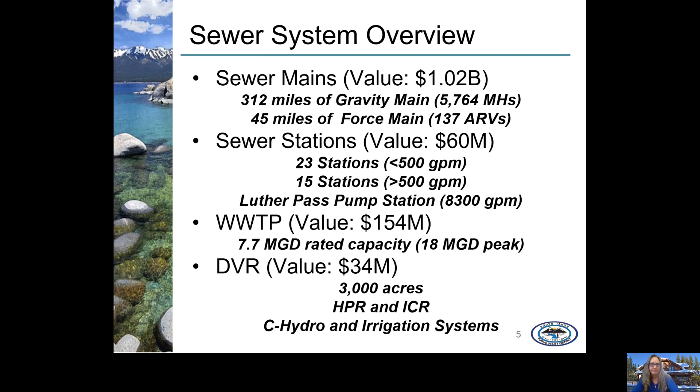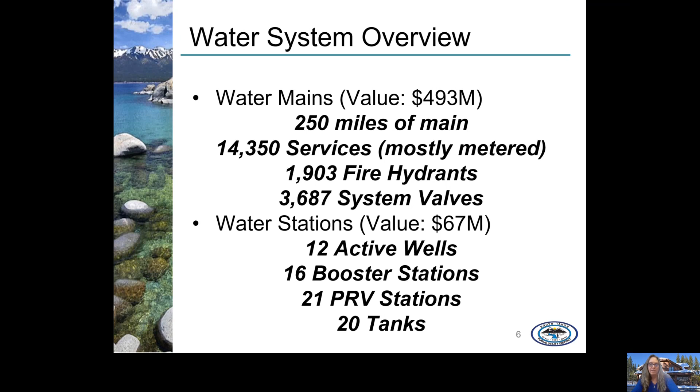The origin story of the district's water system could not be more different than its sewer system. South Tahoe Public Utility District did not build its water system. Instead, the water system that we manage today is made up of a patchwork of small neighborhood water systems acquired and cobbled together by the district in the 1970s and 80s. These mom and pop systems were typically installed by developers and were built to a lesser standard than we would design a water system today. Almost 90% of the value of the water system is in its underground piping network.

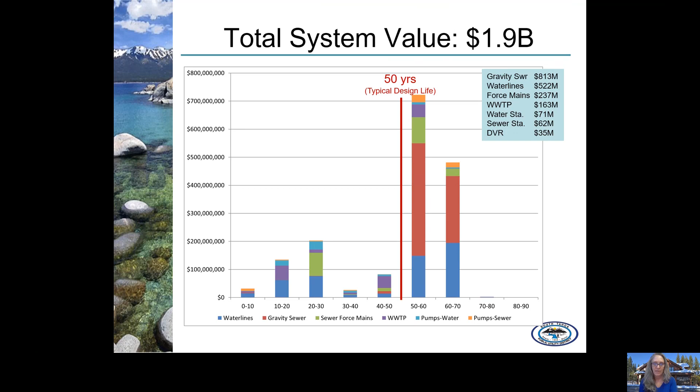One more thing I want to point out about the age of our water system. We use the district's GIS mapping system to develop this plot. Almost all the water pipes in that system have been assigned an age of 70 years or younger. However, district staff recently uncovered a master plan document from 1960 that suggests portions of our water system that are still in service today were likely installed as early as the 1930s. So this graph actually underestimates the age of our water facilities. There should be blue columns in the slots for 70 to 80 and 80 to 90 years old.

So how do we assess our system annually to come up with the capital improvement program to rehabilitate our aging assets? First, I want to make clear that we don't develop a wish list or a catch-all. We are very methodical about how we decide which potential projects make it onto our plan for the next 10 years. These are the projects that are needed to maintain a system in good health. This is also not the unconstrained projects list, which is a term that we often use. I'll talk about the unconstrained list in more detail later, but basically the unconstrained list is a long list of additional projects that we have identified but that did not make the cut for the upcoming 10 years. The projects on that list could become critical at any time and get moved up onto the 10-year plan.

The district has selected 10 years as its planning horizon because that is a manageable time frame. It allows enough time to plan, design, and fund projects without looking so far into the future as to become cumbersome. 10 years is also a reasonable time frame in which we should expect to be able to meet many of the goals that we've set for ourselves. If it's going to take more than 10 years to achieve a goal, is it really a priority for us?

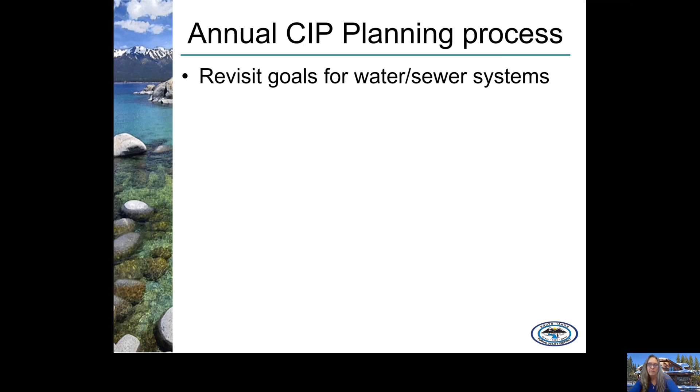To define the projects considered for the plan, first the engineering managers meet with each of the crews individually to review the list from last year and add new projects. We listen to their concerns for their facilities and weigh their priorities.

There are also a few projects that engineering has added to the plan to anticipate future system needs, mainly gravity sewer and water pipelines. We look back at the inspection and leak history over the last year, update our projections, and move new projects onto the 10-year plan if warranted.

We figure out what facilities are not getting the attention they need, and we add new asset management programs to the plan to provide us with that information so we can make smart decisions for those facilities in the future.

Once we have the project list, we look at the timing, spread the projects over 10 years, distribute the costs and workloads evenly, and submit that to finance for budgeting.

We have some back and forth with finance and we discuss the needs with our board. That's what we're doing today.

The last thing we will do is take the new plan and update or compile new project information sheets. These sheets were distributed to the board for the first time last year, and we'll update those this year and redistribute them both to the board and to staff, then post them on the website later this spring once we know what next year's budget is likely to be.

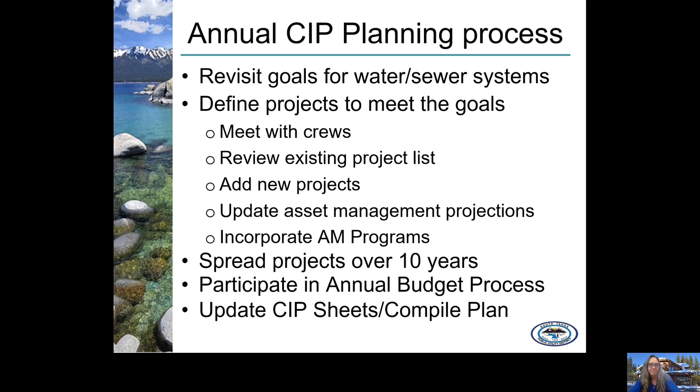Some questions I've heard from the board are: what makes a project? How does staff decide what goes into the plan? And what turns a concern or a project concept into a need that should be addressed in the next 10 years? Well, the project must achieve a goal that the district has set for itself.

The main goal of the CIP is to address critical failures within the systems. But beyond that, we also need to address other deficiencies. To guide us, we turn to the levels of service criteria that the district has developed for itself, and we consider other external drivers, such as interagency coordination or pending regulation, to help set our priorities.

Just a bit more about the levels of service. What are they? These are a list of goals that the staff has developed with board input for the water and sewer systems. We did those for the water system back in 2013.

with our last water system optimization plan. And even earlier than that, we developed the levels of service for our sewer system back in 2009 with the collection system master plan. Those sewer system goals got updated for our Big Five condition assessment for our 5 largest sewer pump stations over the last couple of years.

Basically, if a project concept aligns with any of these goals, it moves forward. If it doesn't align with these goals, the project doesn't move forward. It may, however, remain on the unconstrained list and wait for either the goals to change or the condition to change so that it drives up the project's priorities.

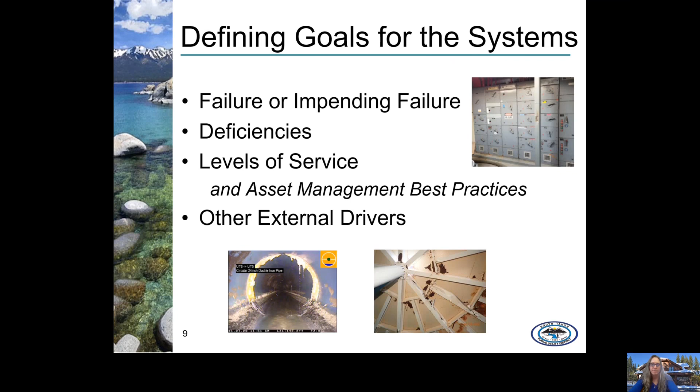Let's talk specifically about what goes into our CIP or our needs-based plan. This slide describes the specific goals for the projects included on this year's sewer needs-based plan. All of the projects on this year's plan meet one or more of the goals on this slide.

This is the same list of goals that we used to build the plan last year. It didn't change from year to year.

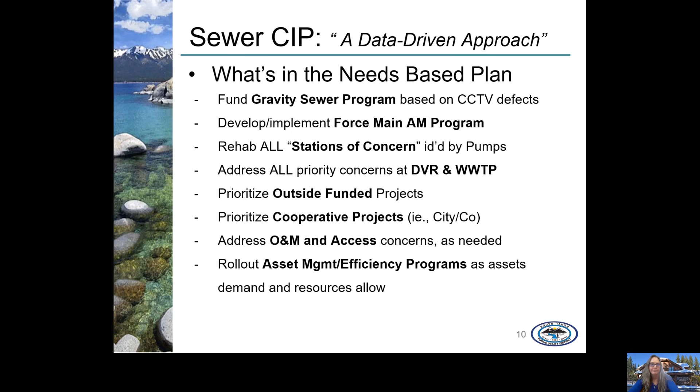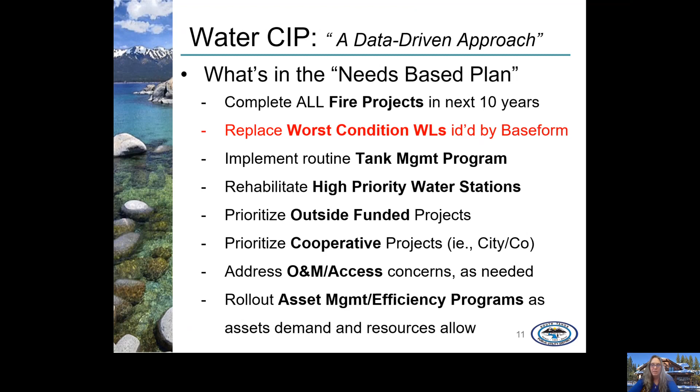This year, we input our complete list of waterline projects into our new artificial intelligence tool called Baseform, and Baseform ranked them for us by priority. We made sure that the 20 waterline projects with the worst condition scores made it onto this year's water needs-based plan. This added around 20,000 linear feet of waterline replacement to the plan, and it accounts for most of the increase between this year's plan and last year's plan.

So that's the process we followed to develop our CIP plan in a nutshell. At this point in the presentation last year, I gave the board a brief overview of several of the most stressed parts of our system, talking about water tanks, sewer pump stations, the wastewater treatment plant, and so on.

Today, we're going to focus solely on water lines because that is the system that has been the hardest hit by past funding decisions, and it is the system we are most concerned about its continuing health moving forward.

At the risk of repeating myself, it's important to remember that the district did not construct most of its water system itself. It consists mostly of mom and pop neighborhood water systems acquired by South Tahoe PUD in the 1970s and 80s and cobbled together into a very complex network of zones and a wide mix of construction methods and materials.

Here's our current situation. This year's proposed capital improvement plan for the water system calls for over $73 million in water line replacement in the next 10 years. Water lines account for more than 65% of the total needs for the water system. By contrast, this past year's budget approved a 10-year plan that would only replace $33 million in water lines over 10 years, even though more than 50% of the current budget is for water lines.

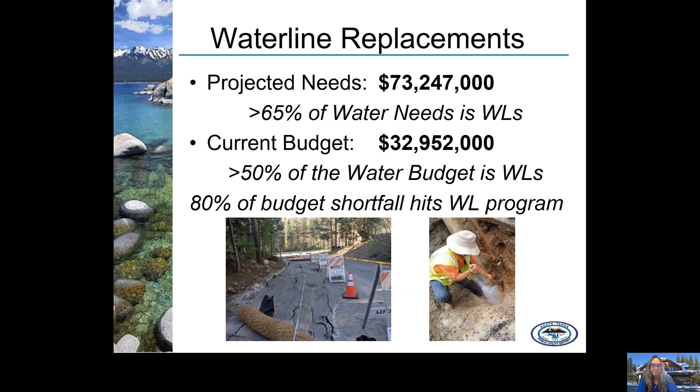Before we start to talk about the condition of the system, let's take a minute to look at the goals the district has set for its water lines.

The district has set a goal for itself to have 100% of its water system provide customers with access to emergency water. The district has also set a goal to maintain an annual replacement rate of 1.7% of the total system value or more per year.

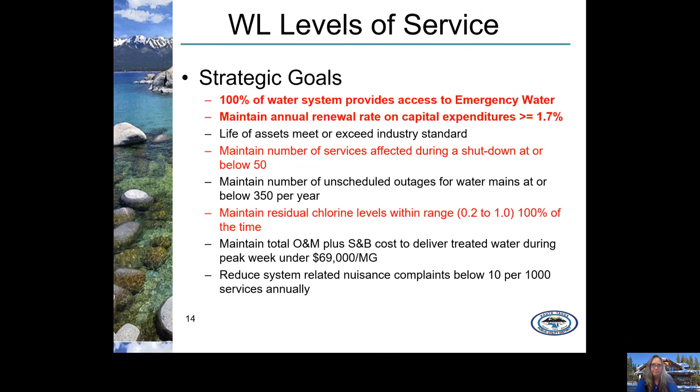Over the past several years, the district has gotten pretty good at comparing its current performance to its own past performance, but what we haven't done a lot of yet is compare our performance to others. There are tools for that. For today's presentation, I decided to use the 2020 AWWA—that's the American Water Works Association—benchmarks survey to see how we are doing compared to other agencies in our region. The AWWA defines our region as the Western United States, Western Canada, Alaska, and Hawaii.

So, starting with the replacement rate: according to the AWWA benchmark, 25% of the agencies in our region replace their assets at a rate at or above 1.5% of the system value per year, and 25% replace their assets at a rate at or below 0.4% per year.

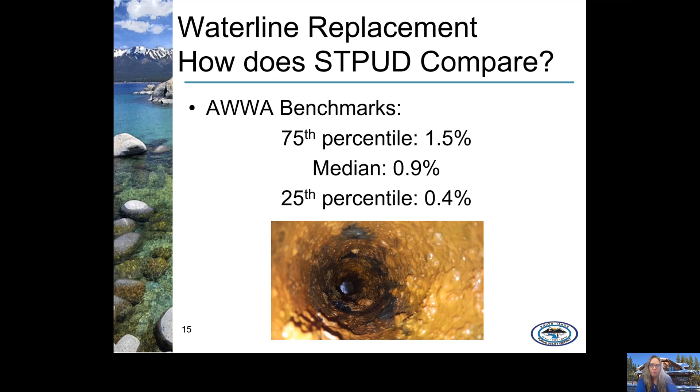The red bar is that 1.7% level of service goal that the district has set for itself. To replace 1.7%, we would be replacing 22,500 linear feet per year, and we could replace every pipe in our system over a 60-year period.

In the early years of the program, we were doing pretty well. We were meeting or exceeding the target around half the time, and we were averaging about 1.2% replacement rate per year. But then in 2009, our replacement rates started to drop, and they've never really recovered.

In one year, in 2014, we had a pretty big year. We installed 3 waterline projects across the city area, but then our progress plummeted. The focus shifted to the meters, and the waterline replacement program has essentially collapsed. We've just started to recover, but at a small fraction of our former annual replacement rate.

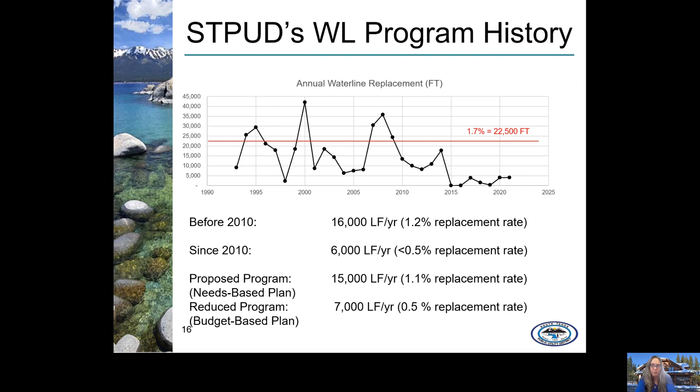We've been concerned about contractor capacity to take on the volume of work that we need to complete. But clearly, in the past, we have found ways to get that much work done. In 11 of the last 29 years, we constructed more pipe than we're currently proposing that we install over the next 10 years.

Now, let's take a look at the other level of service goal that we're going to focus on today: how are we doing providing access to emergency water? For fire hydrants, fire pumps, and backup power, all the known deficiencies will be addressed in the next 10 years with the current budget. And the district has been very successful at getting outside funding for these efforts.

So while the current 10-year plan sets aside capital funds for them, it is very likely that the costs associated with these goals will be at least partially offset by grants. But the biggest piece of this level of service goal is addressing undersized water lines in our system, and that element is underfunded in our current budget.

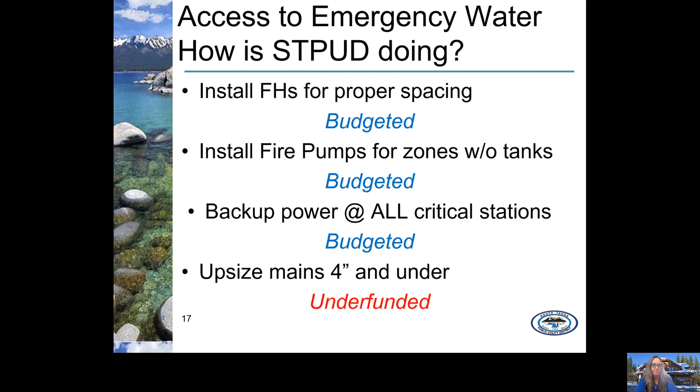As of 2013, when the levels of service goals were defined, we had 242,000 linear feet of 4-inch and under water line remaining in our system. But over the last 10 years, we haven't made much progress chipping away at this number. If we continue at this rate, it'll take another 44 years to replace it all.

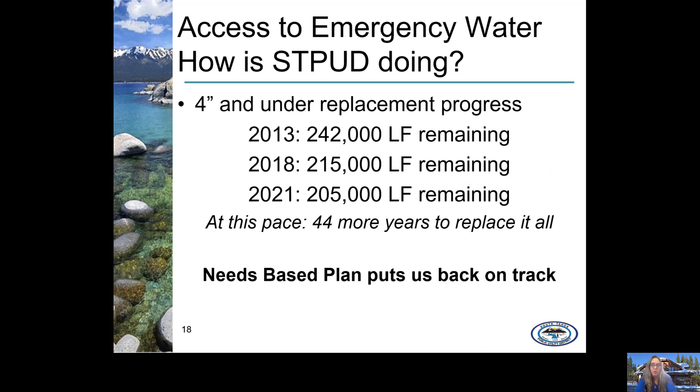However, if we had kept pace with our pre-2010 waterline replacement rate, by now we would have replaced an additional 130,000 linear feet of undersized main, and we would have addressed all of our remaining fire flow needs as well as the top 9 condition-based replacements. If we resume our former pace, then we can address all of our fire deficiencies in the next 10 years.

So that covers how we're assessing deficiencies and level of service goals for our water lines. But the biggest problem is this: is our water system failing? Back in 2017, the engineering department was challenged to improve its use of data in identifying capital projects. We've worked hard on that, and we hope you'll agree that we've made a lot of progress.

We're going to focus on that data to help us confirm that our system is failing. For the water system, our focus has been primarily on 2 criteria.

The first criteria we will look at is our water losses. High water loss is an indicator of poor system health. Basically, we have holes in our pipes. We are not as interested in how water loss affects the district's cost of water. We are more interested in what water losses tell us about our pipe's state of failure.

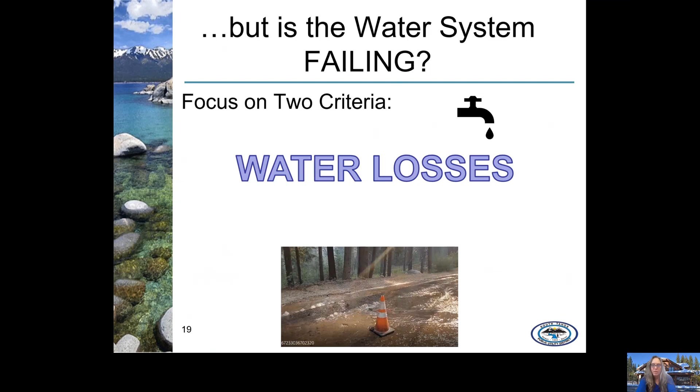You've heard a lot from Steve Caswell, our principal engineer, about water losses in the past several years, as he helps the district navigate the upcoming water loss regulations. So, on top of being an indicator of system health, water loss will soon be a metric used by the state to regulate us. If we cannot meet the standards that they set for us, then we will risk penalties and loss of grant funding, and we could even be compelled to increase our pipe replacement program. Because we are now fully metered, our ability to accurately measure our losses has improved greatly over the past few years.

The second criteria we will look at is our history of water leaks. The primary function of our water crew is to repair leaks on a system. And over the past few years, we've put a lot of work into improving our record keeping so that we have a robust leak history. The leak history is now the most comprehensive body of data that we have for establishing the health of our system.

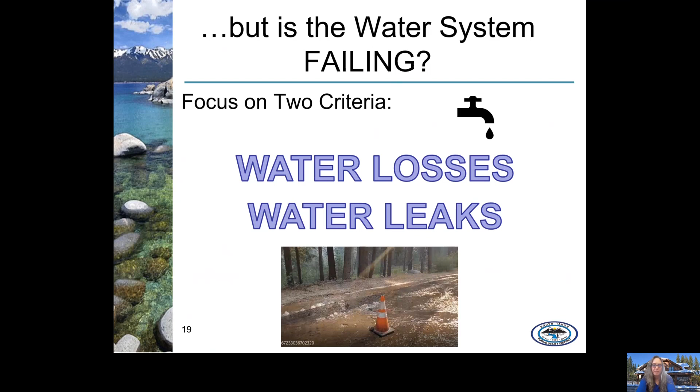Let's take a look outside STPUD again.

AWWA has set a benchmark for real water losses in gallons per connection per day. In our region, the best performing 25% of water purveyors have water losses of 20 gallons per connection per day or less. The worst performing 25% have water losses of 47 gallons per connection per day or more.

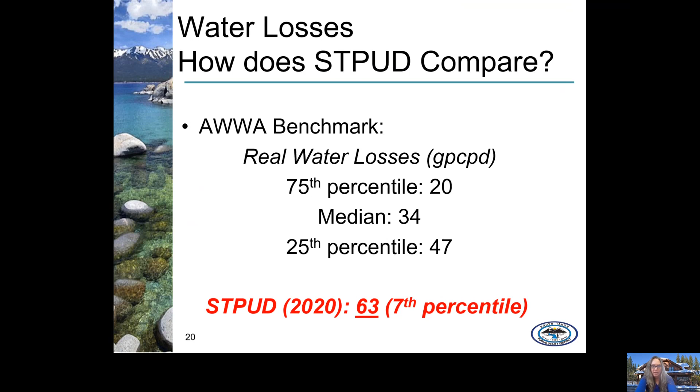So how does STPUD do? South Tahoe Public Utility District in 2020 had a real water loss calculation audited by the state of 63 gallons per connection per day.

That puts us in the worst 7% of water purveyors in our region. Now let's talk about water leaks. The AWWA benchmark study suggests the best performing 25% of water purveyors in our region have less than 3.8 leaks per 100 miles of water main per year. The worst 25% have more than 29.1 leaks per 100 miles of water main per year.

So how does the district compare for leaks? In 2021, the district repaired 56 leaks per 100 miles of water main. That puts our water system in the worst performing 10% of water systems in our region.

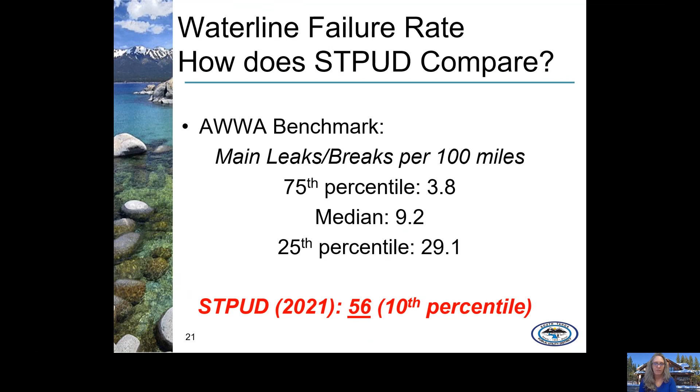Neither of these comparisons for water loss or for water leaks paint a very pretty picture of the current health of the district system.

The next question to ask about leaks is, how has our own leak rate changed over time? In 2021, we repaired a total of 229 leaks. That's up 23% from the average annual total of 186 leaks in 2018 through 2020.

This leak count is concerning for what it means for staffing and system health, but how does that translate into dollars and cents? Well, that picture for 2021 is even worse.

In 2021, we spent a total of $1.2 million repairing leaks. That's up nearly $500,000, or 68%, from the average annual expenditure from 2018 to 2020.

It's worth noting two things about this increase in costs. First, in 2021, we had two major breaks on Normuck and View out in the county that destroyed sections of roadway. The costs to rebuild those roads are excluded from these totals. The work hasn't been completed yet.

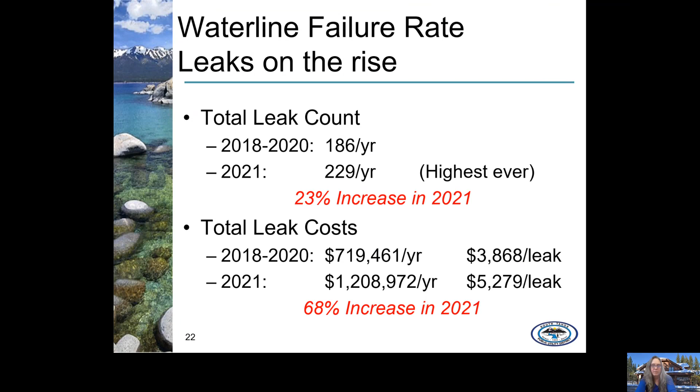Second, all these costs are presented in today's dollars, so year-to-year inflation has already been accounted for. Our assessment of the situation is that the leaks are becoming bigger and tougher to repair. We expect the upward trend in cost to continue.

In developing our water line replacement plan, the biggest challenge for the district is this: to replace enough pipe each year that the leak rate halts, or better yet, that it retreats. Why is it important to head off these failures?

There's lots of reasons, but some of which I've already mentioned. The two most direct implications are: leaks tax our water crew and keep them from focusing on other priority activities like fire hydrant maintenance, valve exercising, and flushing. And two, our leak count is an indicator of our water loss.

If the state is going to regulate our water loss, then we need to maintain our current levels. If we allow our water loss to increase, we expect it will have negative financial implications for the district.

But how do we predict and get ahead of a buried system that we can't see? Right now, BaseForm is the primary tool that we're using to look ahead. We've talked about it before.

This tool is updated periodically, every few weeks or months, with our GIS data and our leak data, and it plugs the data into an algorithm developed with input from other water systems to predict our future failure rate. We are still developing the tool, but we are now at a point where we can use it to help us make some decisions about the future.

So what is it telling us? First, if we were to replace 22,000 linear feet of the projects that we've already planned every year for the next 10 years, we would expect our leak rate to hold steady.

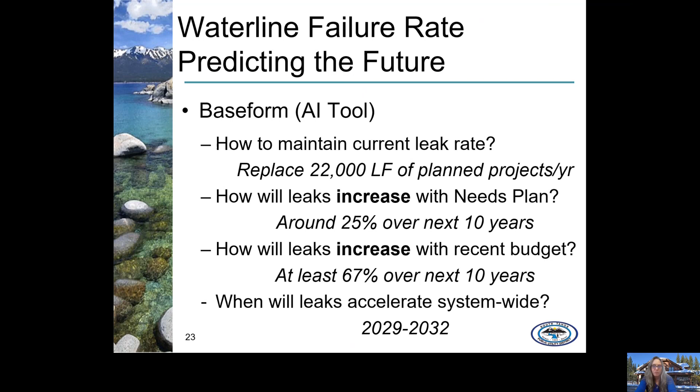We expect that the rest of our system, system-wide, will see a big increase in leak rate in the next 7 to 10 years. We really need to get our current project list completed so that we can start to plan for those next areas.

Clearly, I am making a plea today that the board fund the needs for our waterline replacement program. But at the same time, we can't let our sewer program fall behind.

Over the past 2 years, in response to the unprecedented circumstances of the COVID-19 pandemic, the Board of Directors chose to hold water and sewer rates steady, not implementing pre-authorized rate increases and implementing rate relief programs to support our customers in need. These actions had a big impact on the progress of the district's capital improvement program.

Now we need to resume investment in our capital improvement program. How much do we expect it to cost to address the current needs of the system in the next 10 years? We need $101 million for the sewer and $113 million for the water.

There is a little ray of sunshine for the sewer plan. A $101 million program is actually down $5 million from last year. But after developing the project list for the water side, the water needs are up $15 million from last year.

I am concerned that the needs of the water system are spiraling out of control. Last year, we had roughly a $40 million delta between the needs and what was budgeted for water.

This year, it's grown to nearly $50 million. Which needs don't get met in the next 10 years if we stick with a similar budget as was funded last year? If you dive into the...

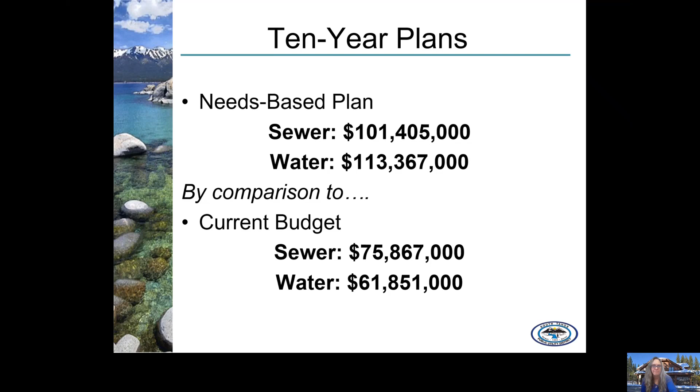As a reminder, the 10-year plan includes only the highest priority projects that are well enough defined that we can develop preliminary estimates of cost. There are many more projects in various states of development that will compete for a place on the plan in the next few years. There's the unconstrained list, projects that are already defined but are not high enough in priority to make it onto the plan.

On that list are 37 water line projects, 17 sewer projects. These are mostly pump station rehabilitations, underground piping replacements at the wastewater treatment plant. We're continuing to assess the condition and deficiencies of our system, and we expect those efforts to define more projects soon. In addition, there are 2 notable types of facilities that are crucial to our operation and are mostly of the same age. We want to spread out their rehab over time, but before we can define projects for them, we need to assess the needs of each facility and make a priority list.

And finally, some of the projects on the plan have been budgeted as rehabs. Based on our past experience, however, it is pretty likely that some of these projects will grow through the design phase to become full facility replacements at additional cost.

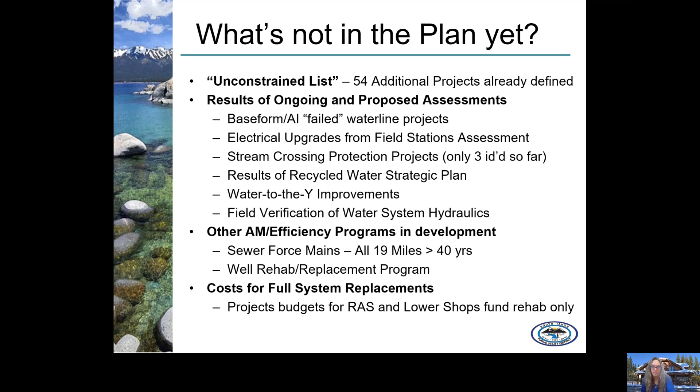And one more thought about what's not in the plan. We're currently in a very uncertain time for engineering projects. Materials are scarce, lead times are long, and contractors are busy. For our Bowers Waterline project that opened bids in February, we received only 1 bid, but we don't have the luxury of waiting. The systems need our attention, and many of our funding sources have hard deadlines, so staff intends to move forward with projects even at a higher price.

Our plan is built assuming construction costs rise 3% per year. Historically, this has been a reasonable planning metric, but right now, prices are escalating rapidly, and we're already seeing our bids coming in high. That Bowers bid was spot on our engineer's estimate, but the engineer's estimate was 10% higher than our planning level budget.

If our funding for the CIP does not keep pace with construction cost, then we are able to build less and less each year. We expect our bid prices will come in at least 14% higher this year than last year. That's the highest year-to-year increase in construction cost that the industry has seen in the last 30 years. That increase is not reflected in our plan.

And I'll say one more time, we need to increase rates at least as much as inflation to keep our workload constant. With 0% rate increases in the last 2 years, we've lost a lot of ground that we won't get back without substantial increases in funding.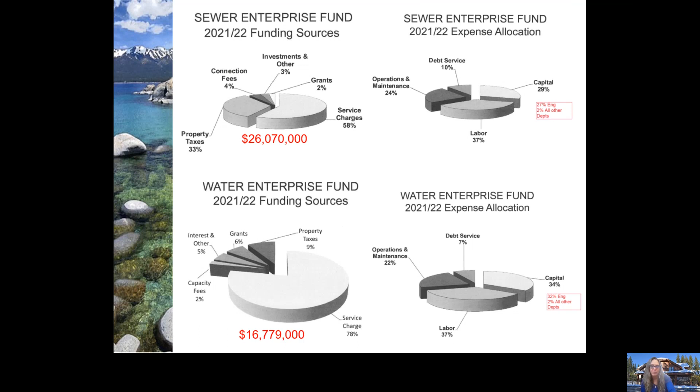On the expense side, you can see that the capital programs account for 29 to 34% of our budget. I've learned from working with our chief financial officer that when he builds the budget, he starts by allocating anticipated funding to operations and maintenance, debt service, and labor. What is left over is what's available for capital expenditures. That's why you'll hear us say that the board's decisions on rate increases directly impact engineering's capital improvement program.

What engineering is asking of our board is to seriously consider funding the capital program this year in a way that will set us up to implement our needs-based plan over the next 10 years. For an average customer, they will see less than an $8 per month increase in their water bill.

Back in 2018, the district went to its customers and got permission to raise rates up to a preset level each year for the following 5 years. This was part of the mandated rate setting process defined under California's Proposition 218. I want to point out that the proposed rate increase for the coming year is actually $5 per month less than what these customers would be paying if we had kept pace with the rate increases that have already been approved.

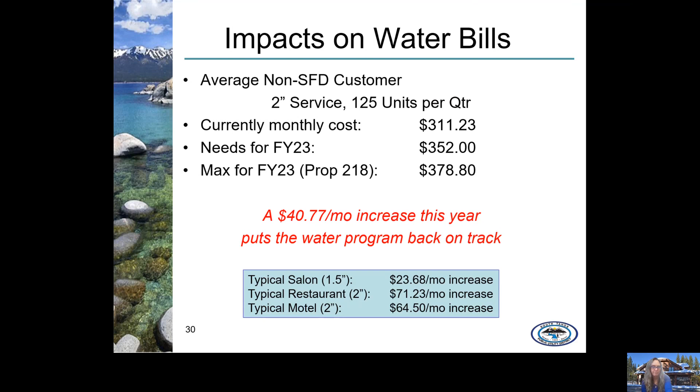Our request for sewer is less. An average residential customer on the sewer side has 3 units and their bill would go up around $4.56 a month. That's around $2.50 per month less than what was the max allowable under the current Prop 218 limit.

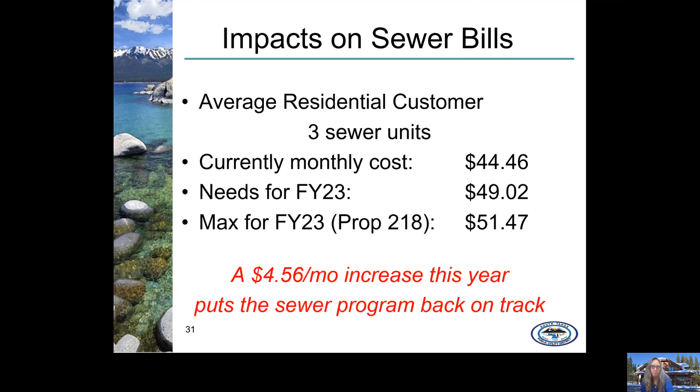And here is the impact on typical business and multi-family customers on our sewer side. They will see a $23.47 per month increase in their sewer bill. For those same three businesses we looked at on the water side, their monthly bill increases will vary pretty widely based on the number of sewer units that they have.

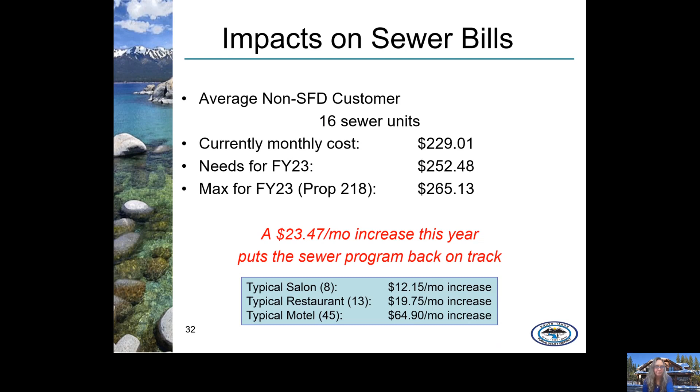While the decision our board makes this year is only for this year, we will be back next year and every year after to talk about funding for those years. So you need to see where we're headed. To fully fund the needs-based plan, the capital improvement program, the district would need to continue to increase these rates steadily year after year in order to avoid big jumps in rates like the ones that we've been seeing from Liberty and Southwest Gas lately. Remembering the pie chart, rates are the biggest piece of the funding pie and the only piece that the board really has the ability to adjust.

So, next steps. As I mentioned at the beginning, this schedule is tentative. If the board wants staff to develop alternative funding scenarios for their consideration, engineering and finance will work together to do that in the next 2 weeks. We will present those to the Finance Committee on March 1st and to the board by March 30th. Based on the guidance we received from the board at the workshop, we will develop notices to customers of rate increases. These can be mailers, advertisements, or both.

Finance will finalize the draft budget by April 22nd, and if it includes rate increases, then we will discuss the need for a public meeting on or around May 5th. We will bring the final budget to the board for a vote on May 19th for implementation as of July 1st.